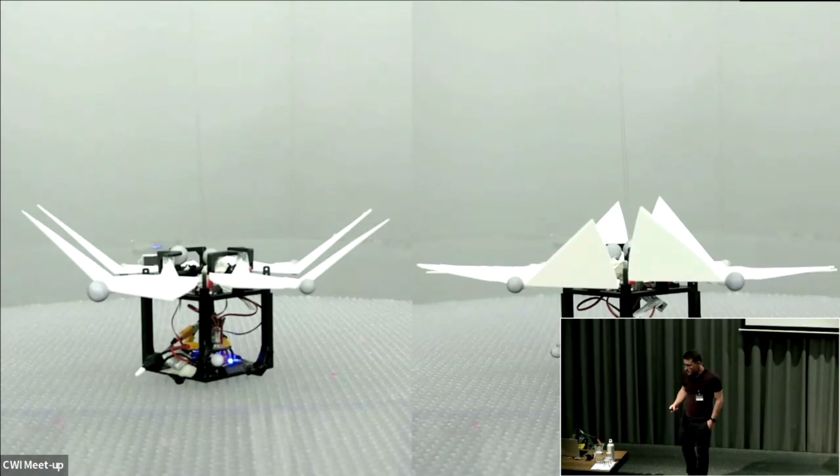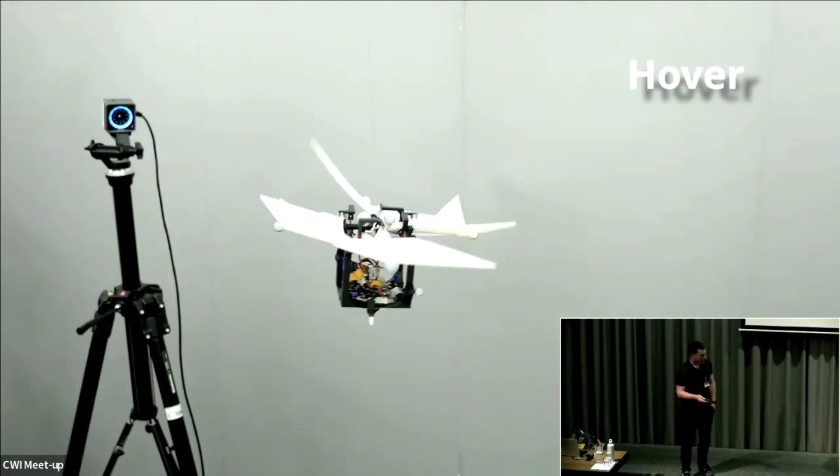So similar to the bird, right? The robot just changes its shape, and that's all it has to control itself. And it can harvest essentially the energy from the environment. And so compared to a quad, for example, you can reduce energy consumption in this wind tunnel with its specific experiments by 50 to 80%.

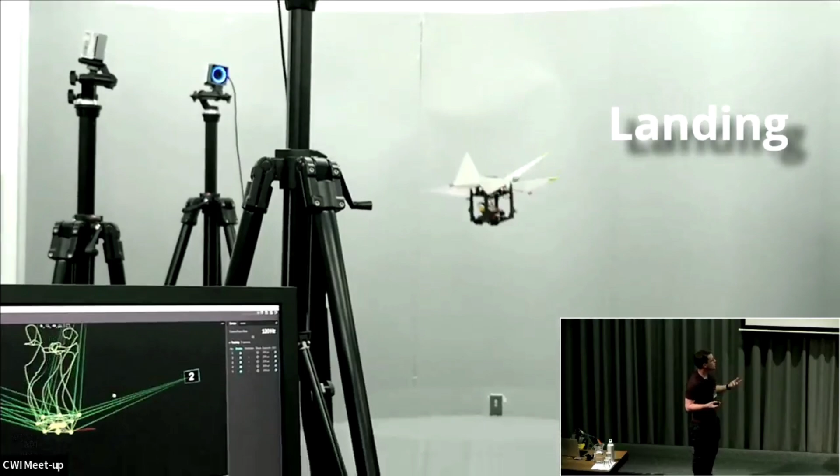And we can track attitude. We can also track position. And of course, it's very turbulent. So it's quite a challenging control problem. And we can also land, as shown in this video. Now, why am I bringing this up?

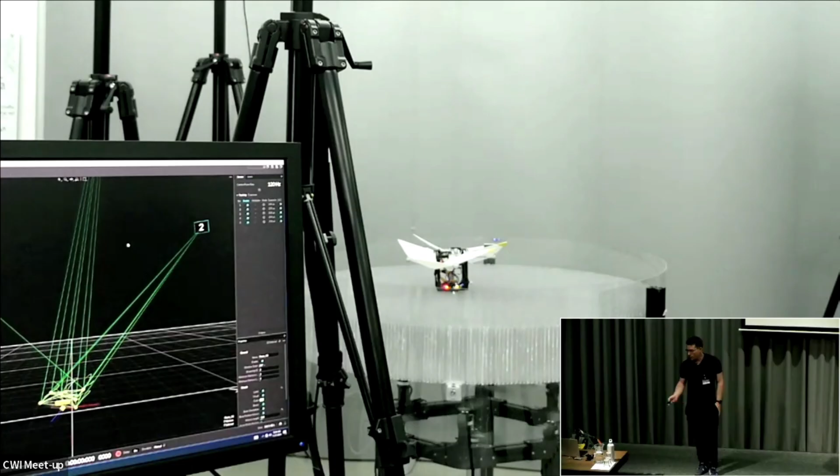Well, when building such a system, there's a question on how do you design it, right? How do you ensure that this is actually going to work? And initially, we thought about multiple designs. One is shown here, right? So you could also arrange these flaps in these directions, and by essentially rotating these flaps, you could try to control all the different degrees of freedom, right?

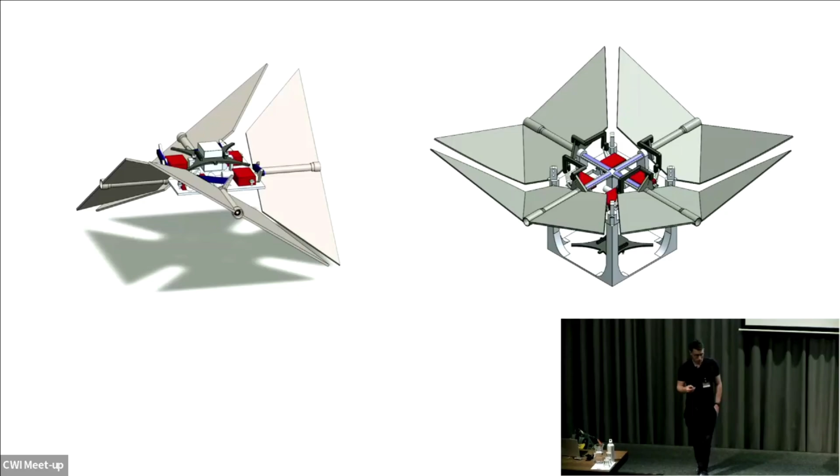Now, it turns out that if you look at the dynamics, there's essentially one tilt axis, right? So there's a sort of concave shape and a convex shape. Along one tilt, it's convex. Along the other, it's concave. And along the concave shape, you have essentially unstable open loop dynamics. And the rate of this instability is so fast that, again, no matter how much data and how much compute you throw at it, you're never going to be able to stabilize this design, right?

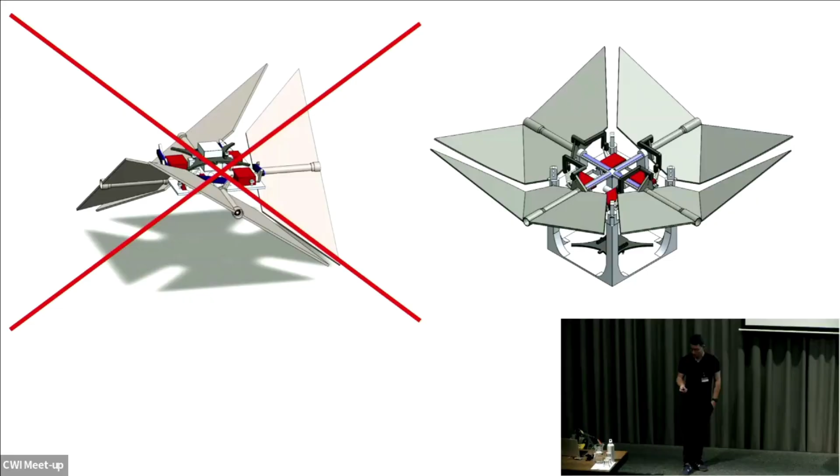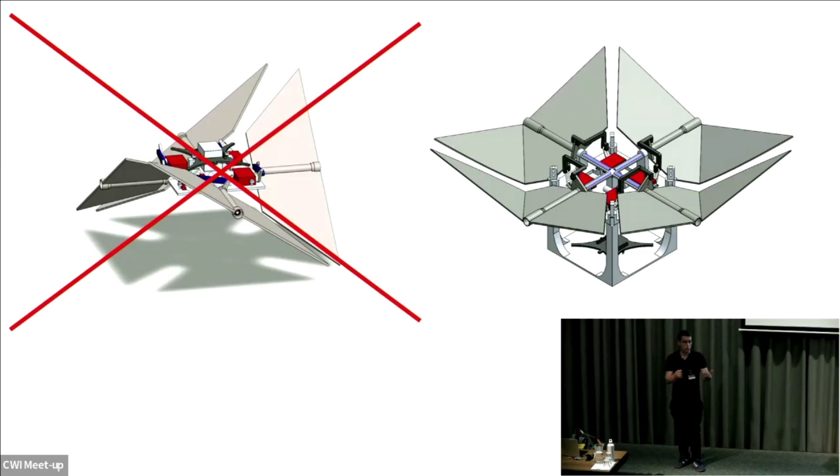And it turns out that you have to modify, or you have to think about more elaborate designs. So we added these kinks. And so as a result, you have a convex-convex shape, a global convex-convex shape, and that makes it work, right? And again, this sort of understanding of what are easy problems, what are hard problems, what are problems that we can solve, what are those that we cannot solve is crucial.

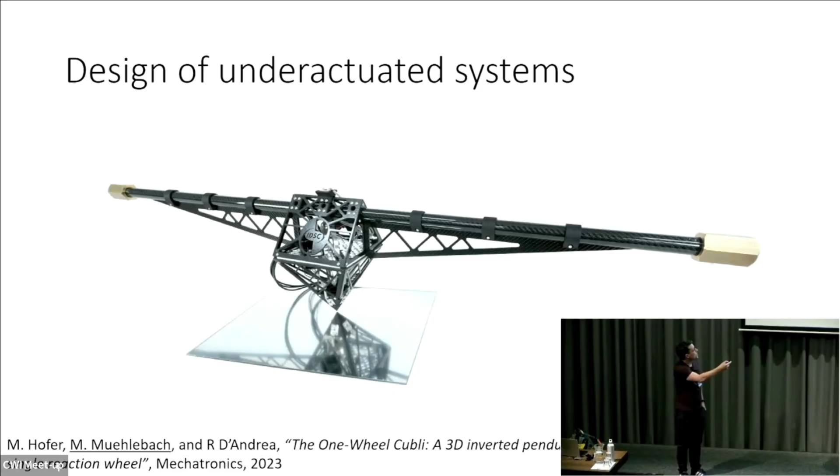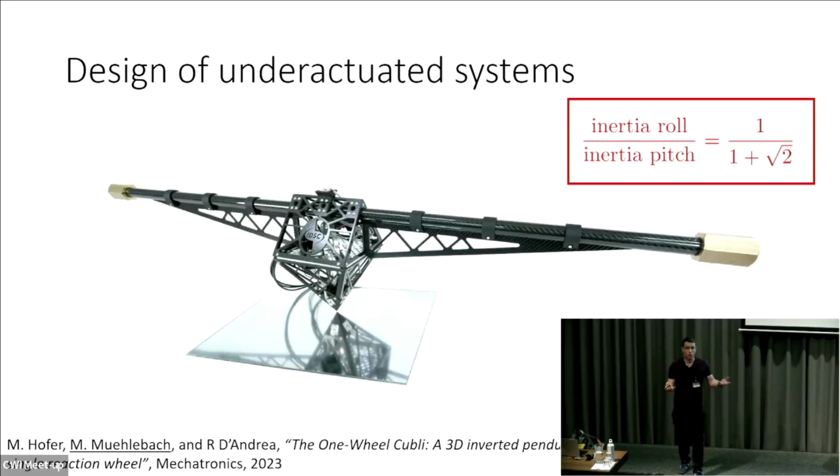So here's the two tilt axes. By a careful design, by introducing this elongated structure, you have a lot of inertia along one direction, very little inertia along the other direction. And the controllability analysis tells you that there's, in this case, actually a closed form expression: the inertia along one axis divided by the inertia along the other axis is 1 over 1 plus square root 2, right? So by choosing the ratio of inertia in this way, you can actually maximize performance, and you can make sure that this robot can actually be balanced, right?

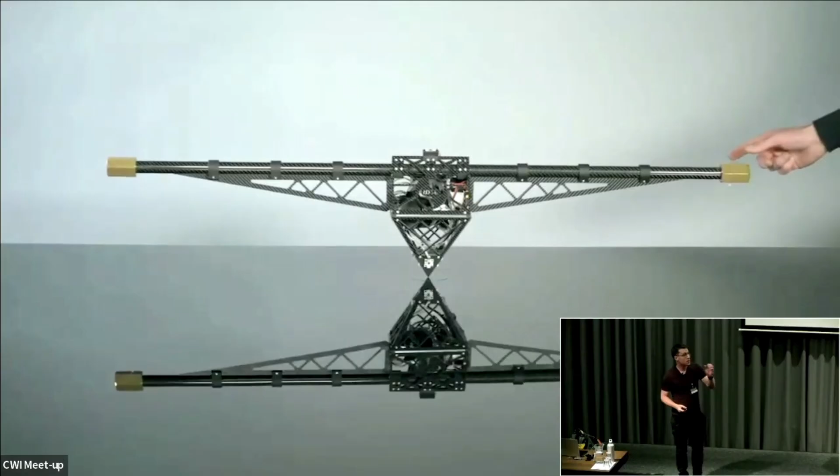And you shouldn't be fooled by this nice-looking video, right? So it took us about three years plus to get this working. This is an extremely challenging task. With only one reaction wheel, you control these two unstable tilt axes, but in fact, you also have to account for structural vibrations in this beam. And so in total, it's about 12 degrees of freedom, most of which are unstable or marginally stable, that you have to control with one reaction wheel. So it's really extremely underactuated.

Okay, so in the absence of learning, we understand what are difficult, what are easy problems, and control theory had essentially contributed a lot to this question. Now, what I would like to talk about is, well, what happens if we add learning to the picture, right? Can we still think about using these control theoretic quantities and incorporate them into our sample complexity bounds that we're going to get for characterizing the behavior when there's learning?

So previously we had a model of the system. We assumed the dynamics are known, right? What's the best performance that we can achieve? That was the question. Now here the question is, I'm interacting with a system that I don't know, right? I need to figure out the dynamics at the same time that I want to optimize performance. Okay, and again, I think an important question is what are easy, hard problems? And so the formalism or the setup that we looked at can be described as follows.

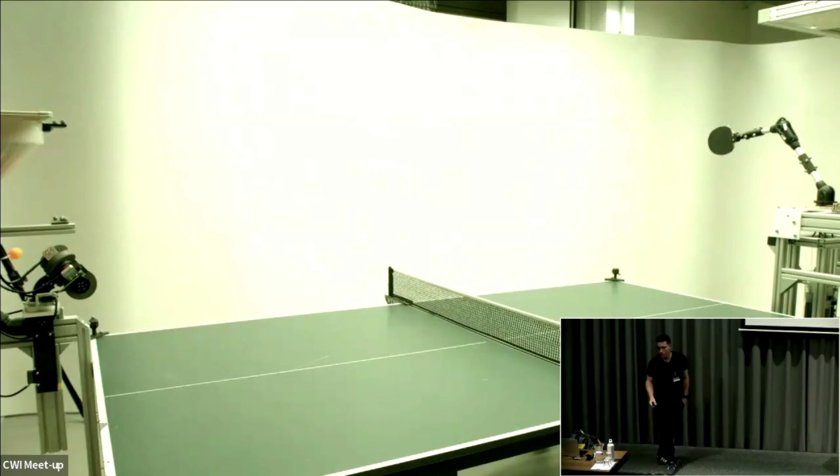And so we did this robot over many years, and we still have it at the MPI. The special thing about this robot is that it's driven by pneumatic artificial muscles. That makes it really cool and really challenging. But we also apply this to larger scale systems, such as... so this is not going to work.

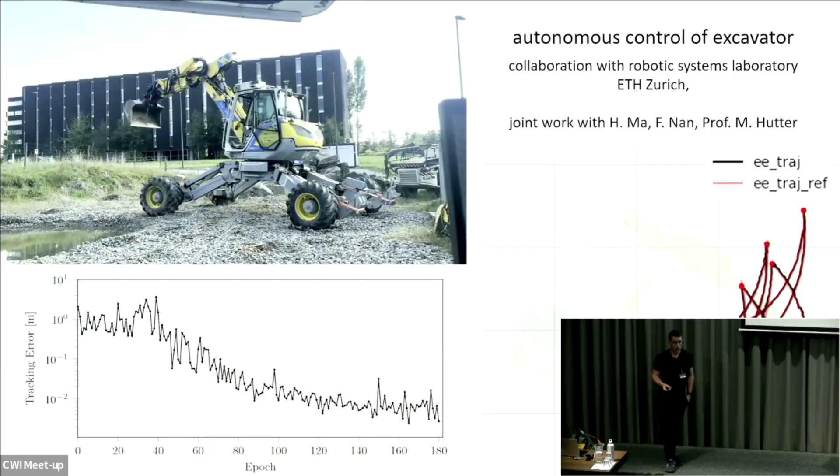Well, right? So we can get tracking error down by performing online experiments. Driving excavators is actually really challenging, and it requires a lot of human expertise to do well, right? And so if we can automate this process, it's a good thing.

And here's another example. So this is a collaboration with EPFL, where we drive the soft robot. So there's this elephant trunk that's essentially driven by a cable pulling mechanism, right? And again, we can deploy the approach I showed you and learn how to track different trajectories very well.

And the last example before the end of my talk I want to show you is, I think, an example that's actually really relevant as well. And this is again a collaboration with Brad Nelson at ETH, and Yazan is one of my PhD students. Now we're thinking about these magnetic actuation systems, right? And the idea is to use these magnetic navigation systems to do minimally invasive surgeries, right?

So for example, you can design catheters that have a magnetic tip. And then by using this magnetic actuation, you can drive or navigate the catheter inside the patient's body, right? That's the idea. And so in this visualization, you see how this could look. So by controlling the magnetic field, you can orient and steer your catheter, right?

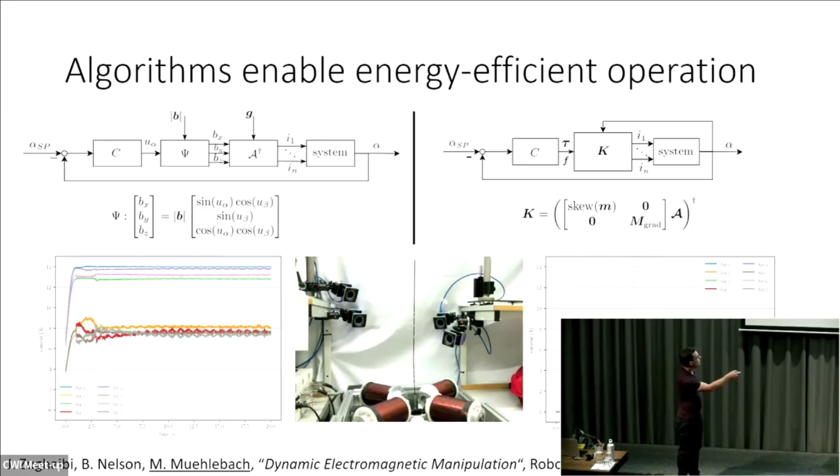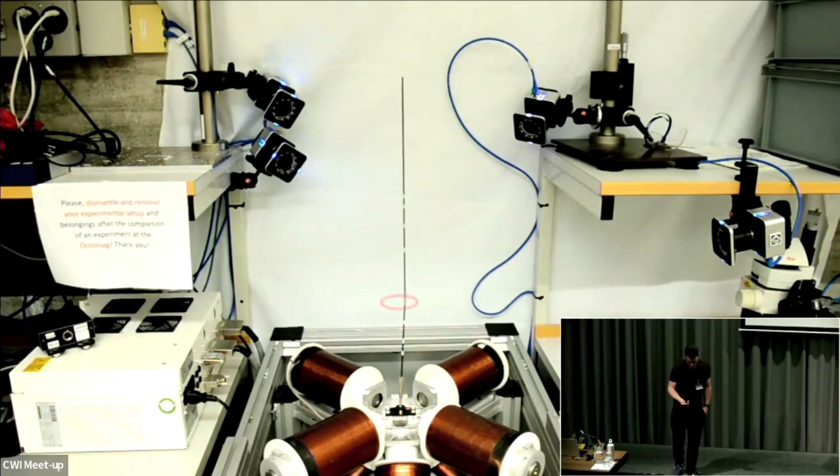Now, in this video, you saw a playful example of some of the experiments we're doing. So we're balancing this inverted pendulum. The bottom part is actuated, the top part is not actuated. And maybe the next video shows this also nicely. Again, the bottom part is actuated, there are the permanent magnets here, and then we balance the top pendulum. So this is really a task where feedback is crucial. You constantly need to adapt and make corrections.

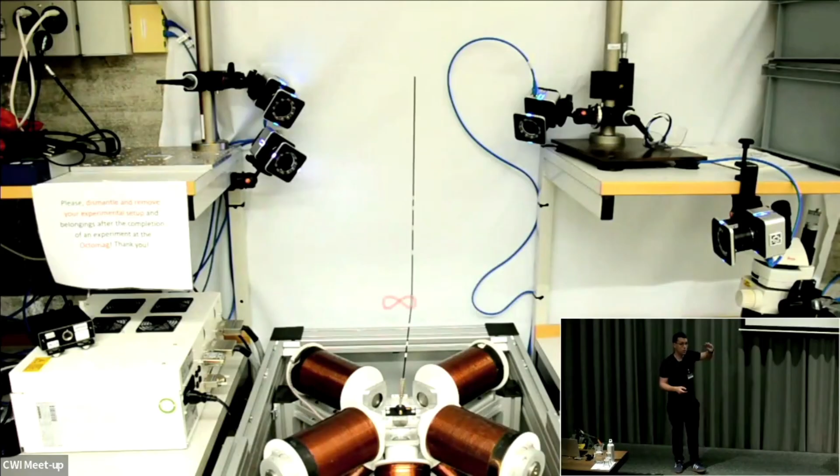And in particular, this learning-based strategy of a feed-forward feedback controller is important. We can, for example, improve tracking by using some learning components, so we can reduce repeatable errors in a very effective way. We're also going in the direction of multitask, so we can actually control two pendulums at two different locations.

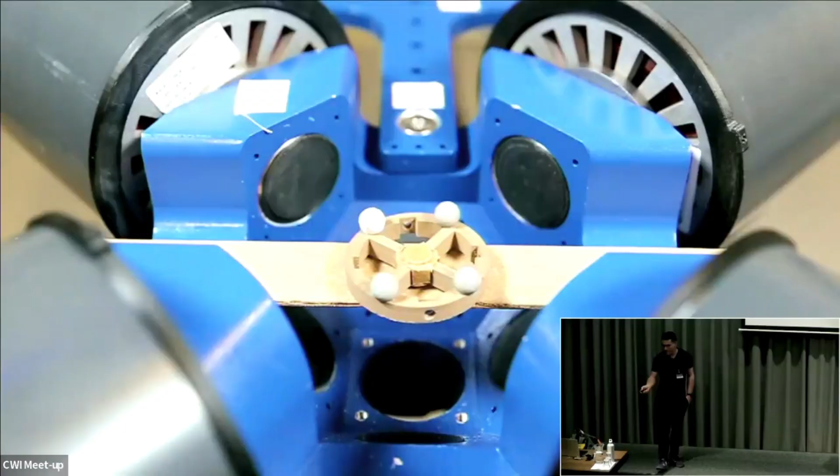And here's the last thing before I'm going to stop. We can also do levitation. So this is a video from last week where, again, there's a permanent magnet here, and we can now control this device very precisely in the entire workspace. So this requires controlling the field in the entire workspace very precisely.